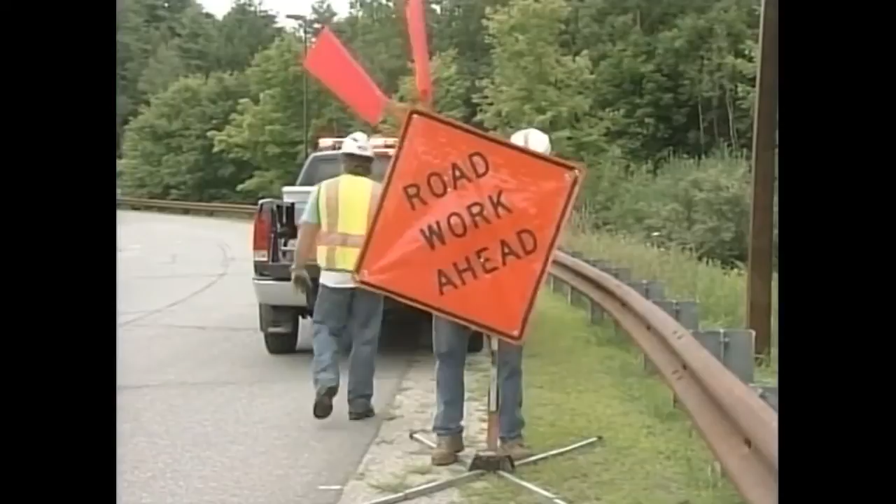Your safety, the safety of your fellow workers, and the safety of the driving public will depend on you performing your flagging operations properly. The minimum qualifications of a flagger are a sense of responsibility, a neat appearance, a courteous but firm manner, mental alertness, and the ability to react quickly. A good flagging operation is not something that just happens. It's the result of planning, good training, and following proper flagging procedures. This program was developed to help prepare you to be a flagger.

As a flagger, you're in contact with the public more than anyone else on your job. Your attitude and appearance directly affect the public's view of operations. A flagger's responsibilities are critical in keeping the work zone safe for workers, pedestrians, and the traveling public, and therefore their sole responsibility is to flag. Your first responsibility as a flagger is to have the proper clothing and equipment in good condition. Improper equipment reduces the driver's ability to understand your instructions. Neat dress and appearance also help you gain the driver's respect, making your job that much easier.

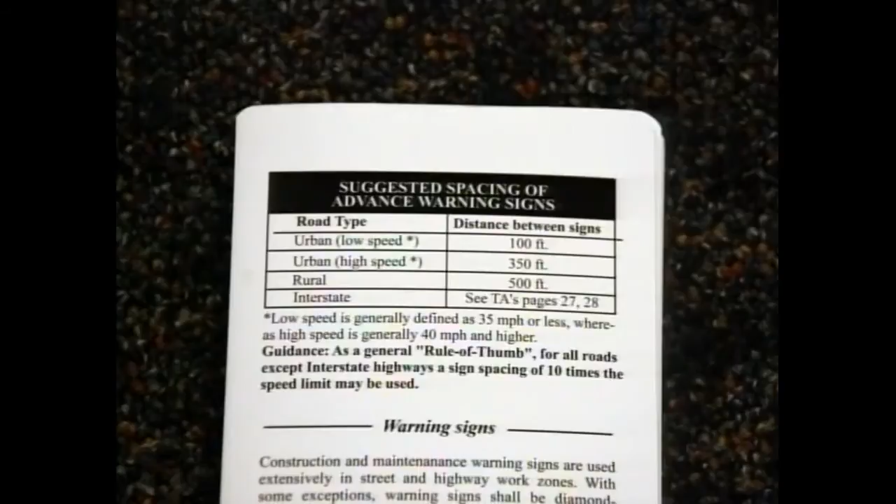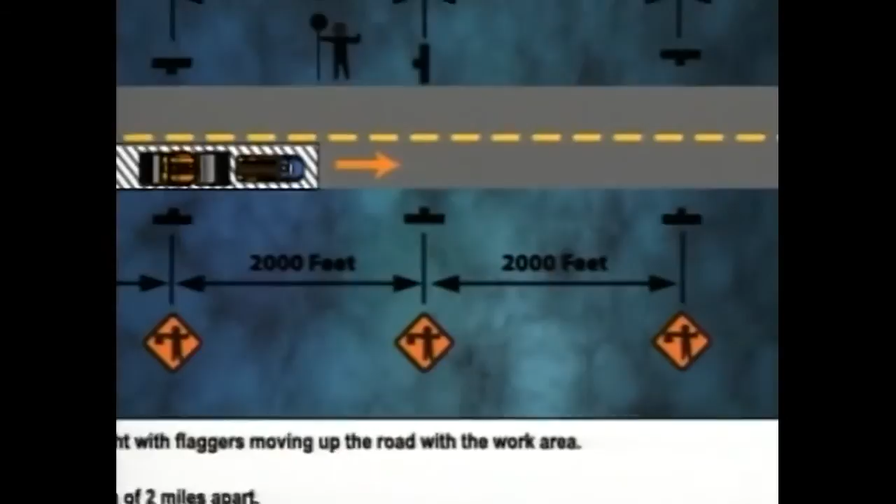Sign spacing shall comply with the current pocket field guide. The flagger symbol sign must be in place and facing traffic when a flagger is present. The distance between the flagger and the sign shall also comply with the pocket field guide. In a mobile operation, such as paving, sign placement shall comply with the Maine DOT approved traffic control plan for a mobile operation. The transition area is generally made up of a taper 50 to 100 feet long. This allows traffic to move out of its normal driving path using traffic control devices to delineate the flow of traffic. The flagger will stand on the shoulder of the road at the first cone in the taper.

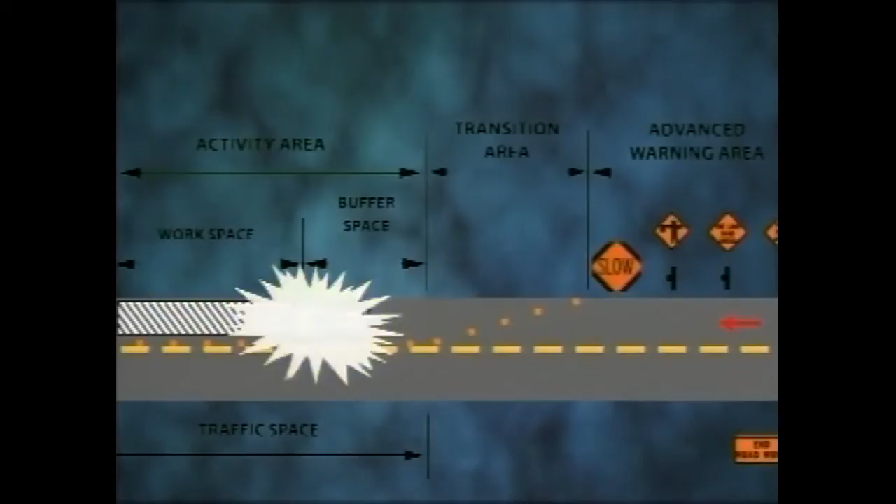The activity area consists of 3 areas: the buffer space, the workspace, and the traffic space. The buffer space creates a safety cushion for those vehicles that fail to yield to the flagger. At no time should personnel, vehicles, or material be located in the buffer space.

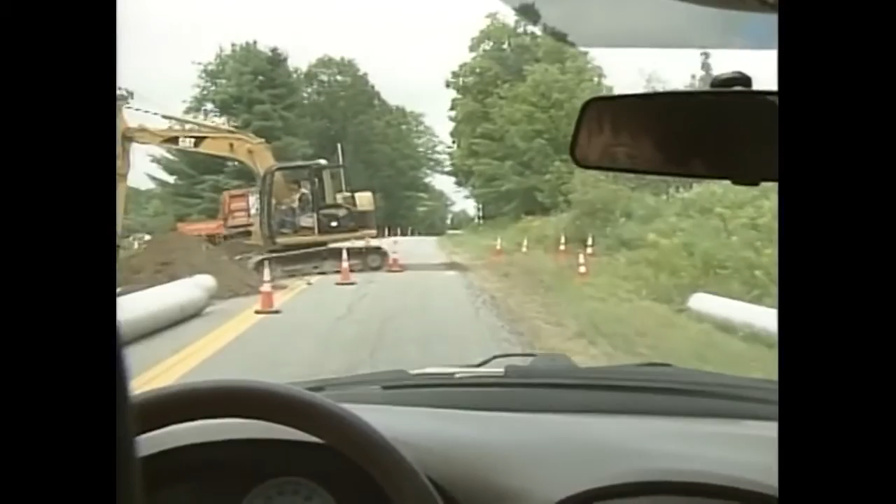The workspace is where the work is actually being done. It is set aside for workers, equipment, and material storage. This space is generally occupied by construction vehicles and workers. The traffic space is that part of the roadway that is open for public travel throughout the activity area.

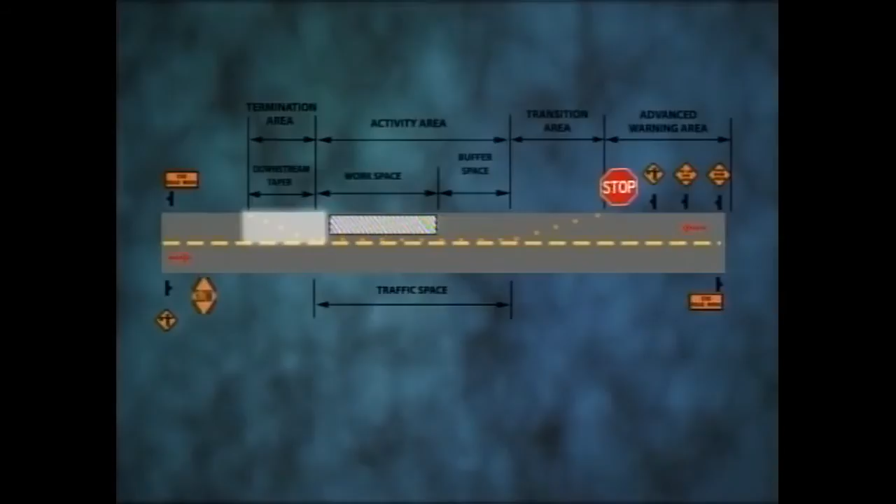At the end of the work zone is the termination area, which moves the traveling public back into its normal flow of traffic. The termination area consists of a downstream taper and should have 5 cones totaling 100 foot maximum in length. In those situations where 5 cones are not feasible, then a minimum of 3 cones may be used, but always allow for the flagger to be positioned 100 feet from the end of the workspace. This allows large vehicles room enough to safely move back into their normal driving lane.

Before beginning any flagging operation, advanced warning signs must be in place. For most flagging operations, this will include a road work ahead sign, a 1-lane road ahead sign, and a flagger symbol sign. In some cases, other advanced warning signs may be used, but in all cases the flagger sign must be in place before flagging begins.

Once the signs are in place, continue setting up the work zone by starting with the taper. Set up the traffic control devices throughout the work zone, ending with the downstream taper. Have flaggers stop traffic in both directions while cones are put in place. With traffic control devices in place and with proper equipment, the flaggers may now begin controlling traffic.

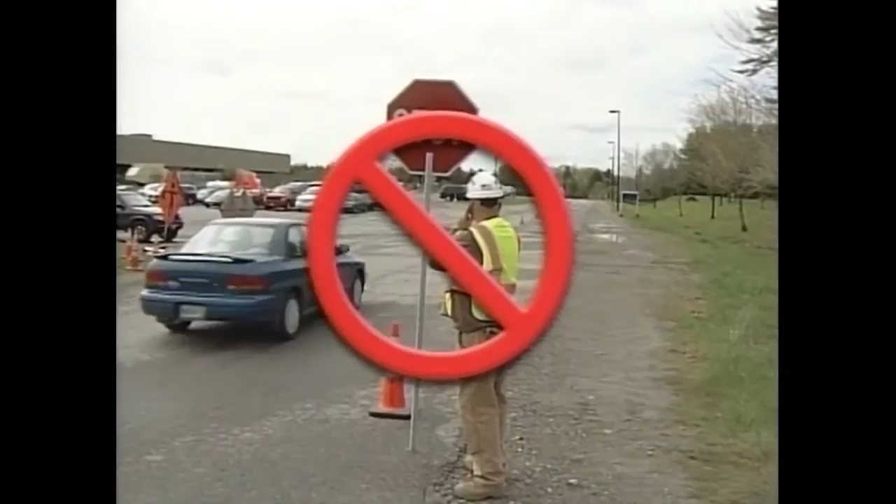Because drivers are sometimes tired, preoccupied, or impaired, you must remain alert at all times. Stay on your feet, facing oncoming traffic. Always stand alone, in a high visibility location, away from other workers and work vehicles. However, never stand directly in the path of an approaching vehicle. Avoid standing in a shadow or with anything inhibiting your escape area.

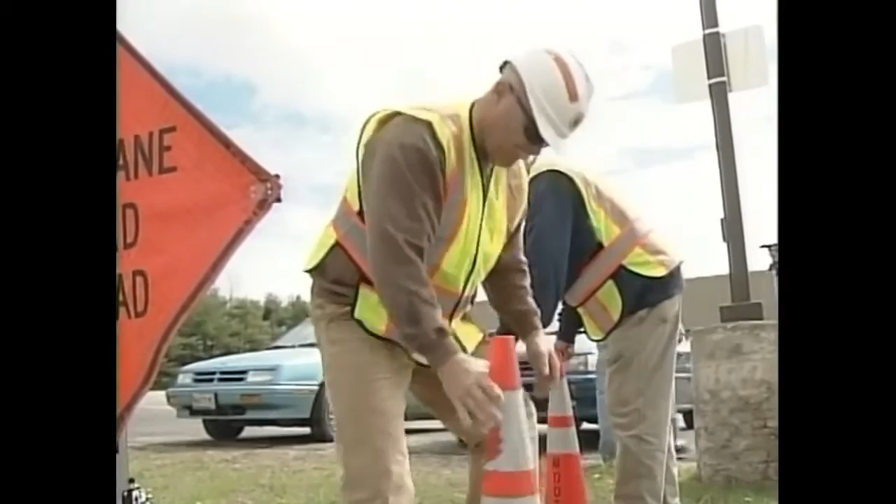When a flagger is required to direct traffic in an area where the escape route is partially blocked by a traversable object such as a guardrail, the flagger shall be physically capable of traversing that obstruction. Prior to commencing a project, the supervisor in charge should review the project, including guardrail area, for safe flagging stations. The flagger should clearly communicate with the supervisor, indicating any locations where they cannot safely perform their duties.

Generally, flagging operations require 3 basic skills: stopping, releasing, and slowing traffic. To stop traffic, stand on the shoulder of the roadway, with the stop paddle away from your body, on or near the edge of pavement. If possible, allow trucks and delivery vehicles to pass through and stop a passenger vehicle as your lead car for maximum visibility. Look directly at the approaching traffic and turn the paddle to stop. Raise your free hand with the palm exposed to the approaching driver. Make eye contact with the driver.

After you have stopped the first vehicle, then walk out to the center of the roadway so the additional approaching traffic can see the stop paddle. Do not cross the center line. Remember to watch out for traffic that may be coming from behind you. Never stand in the path of oncoming traffic. Before you release traffic, move back to the shoulder. Keep your paddle on stop until you are safely on the shoulder of the road. Only then may you release traffic.

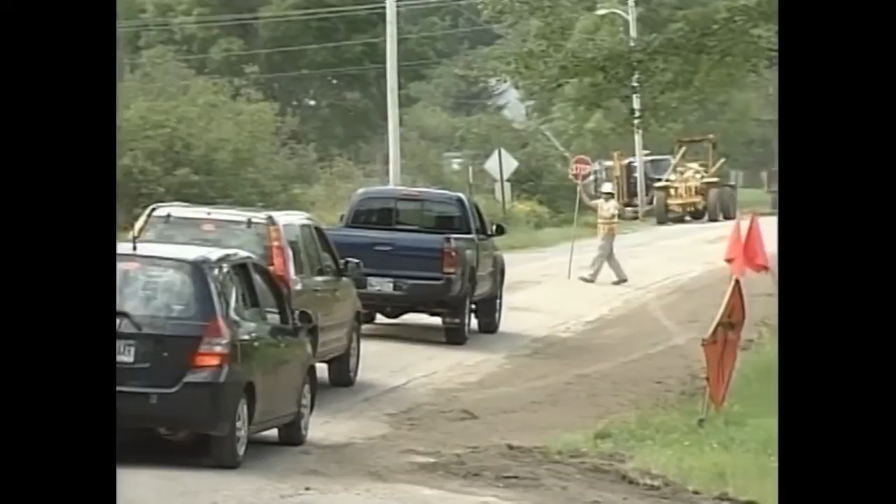The second way to release traffic is from the open lane. After the road is clear ahead, display the slow paddle to the drivers. With your free arm, motion the drivers to proceed. Again, be direct and deliberate in your motions.

In some cases, you may not need to stop traffic but only slow it down. In these cases, always stand on the shoulder of the road. Display the slow paddle to oncoming traffic. Use your free arm to motion traffic to slow down. Remember, never stand in the path of oncoming traffic.

If you learn these 3 basic skills, you'll be well prepared for any flagging operation. Situations will vary and how you apply these skills will differ from project to project. Remember, never start any flagging operation until advanced warning signs are in place. These signs tell the driver that you are controlling traffic ahead. Without these advanced warning signs, the driver does not expect you to be in the roadway.

Now let's look at some typical situations a flagger may face. The first situation is a single flagger operation. In rare situations, one flagger may be used to control traffic on a low-volume, 2-lane road. Where only one flagger is used, the work area must be short and on a straight section of roadway. The flagger must be visible to approaching traffic from both directions.

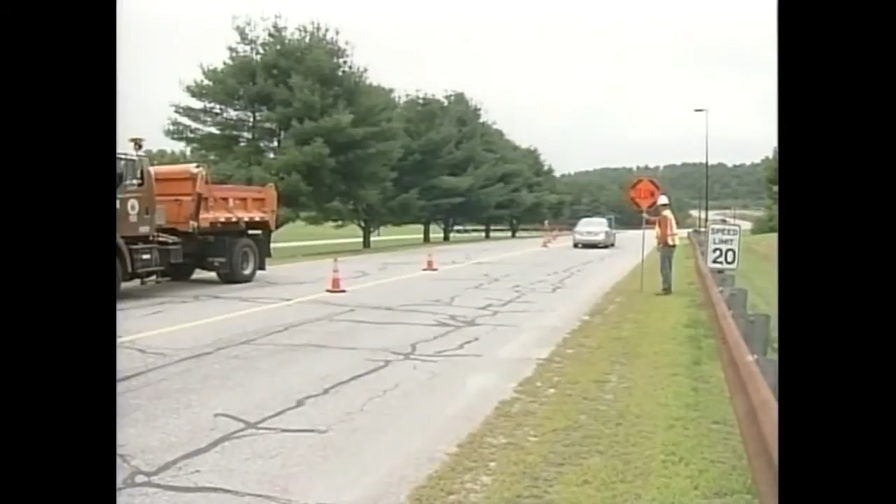In a single flagger operation, the flagger stands on the shoulder directly across from the work area, so that the flagger is visible to traffic approaching from either direction. Then the flagger can assign right-of-way with the paddle. Remember, a single flagger operation is only acceptable for low-volume conditions where there are good sight distances from both approaches and the work area is short.

The second situation, and probably the most common, is the two-flagger operation. When two flaggers are used, they must always be able to communicate with one another. This can be done by either visual contact or by using radios. Radio contact is the preferred method. Radio communication should be kept to necessary conversation. When radio communication is not being used, then flaggers must have visual contact with each other.

In this situation, the operation normally works like this. One flagger displays the stop side of the paddle and stops traffic, while the second flagger displays the slow paddle and releases traffic. The first flagger continues to display the stop paddle and stop all traffic until the second flagger turns their paddle to stop and gives an all-clear signal. This signal tells the first flagger to release his or her traffic by displaying the slow paddle.

The all-clear message may be given visually by using a hand signal such as lifting one's hand, or by use of the stop-slow paddle. Be careful, however, not to use hand signals that may confuse the motorist. When visual contact is not possible, such as over hills or around curves, or due to equipment in the work area, then radios are the best way to maintain communication between flaggers. Remember, communication between flaggers is vital, and radios are the best way to maintain that communication. It is never acceptable for the flagger to be stationed in the lane to see the other flagger better.

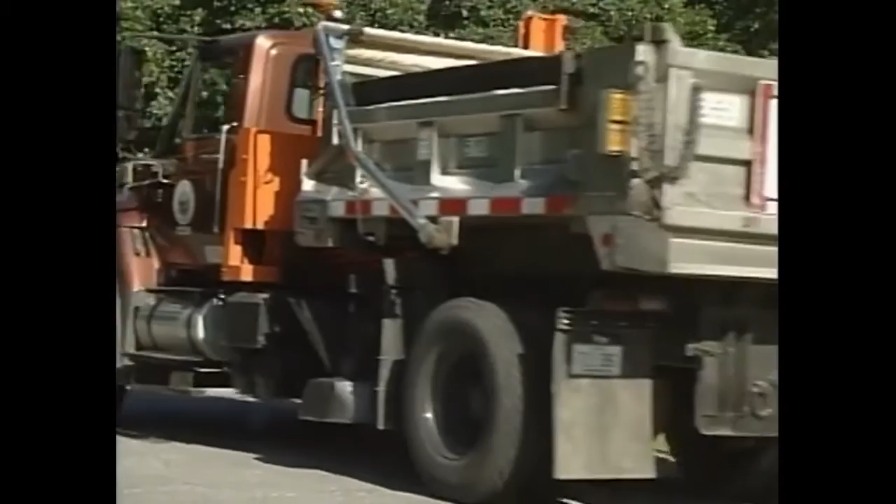The fourth situation involves only one flagger, restricting only one direction of traffic. An example of this is an area where trucks are loading or unloading and are blocking the lane. The flagger stops traffic in the usual manner. Once the work has been completed and the way is clear, the flagger releases traffic.

When releasing traffic on a two-lane highway where traffic is stopped temporarily in only one lane, turn the paddle a quarter turn, so that the word stop faces you. In this position, the sign is parallel to the shoulder of the road so that neither the stop nor slow can be read by the motorist approaching from either direction. The stop message then will not confuse the traffic.

If during normal flagging operations an emergency vehicle approaches your work zone, both directions of traffic should be stopped immediately. Traffic should be allowed to clear the travel space if there is traffic in the lane. Once the travel space is clear, the flagger shall direct the emergency vehicles through the work zone.

In some situations, the workspace moves and the flagger station needs to be relocated. Flagger stations shall be located such that approaching road users will have adequate warning and sufficient distance to stop at an intended stopping point. The flagger advance warning signs shall be moved when the flagger station is moved.

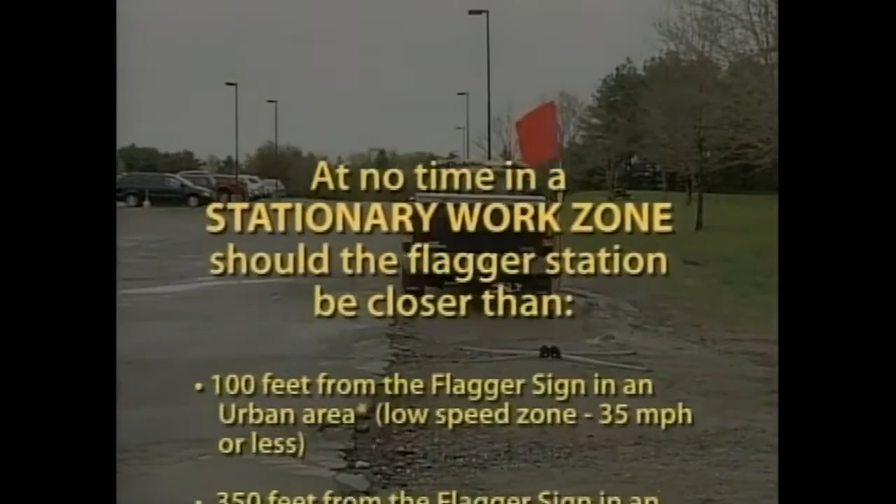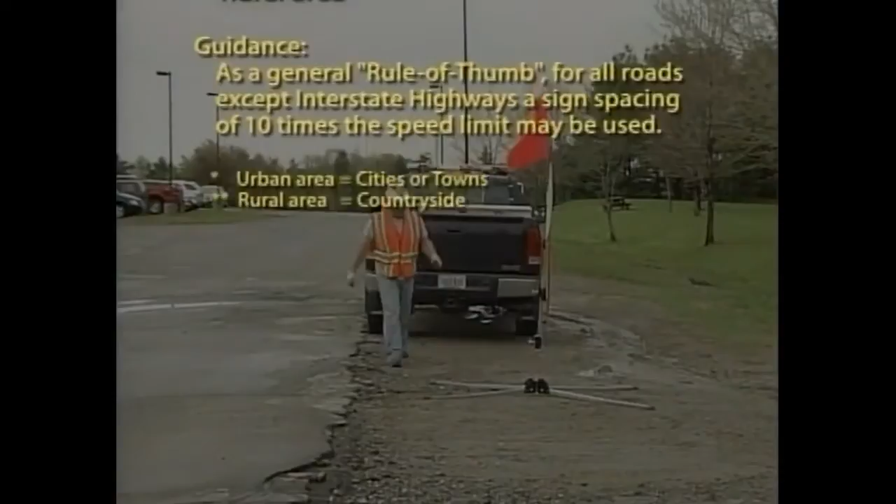When flagging operations are not active, the flagging signs should be covered or removed. As soon as the work is completed and the activity area has been cleared of all equipment and workers, stop traffic in both directions and remove the traffic control devices such as cones or barrels or barricades. Start by removing the cones in the reverse order of installation, beginning at the termination area and working back to the first device installed. At this point, traffic may be released. Then begin to remove the signs closest to your work area and continue to remove them against the flow of traffic.

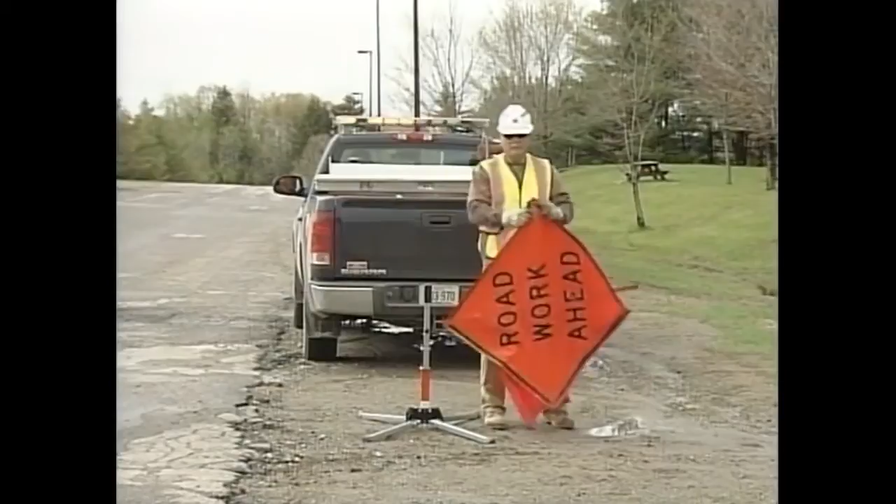Now let's summarize the 5 flagging situations we've just discussed. Single flagger operation. This operation is acceptable for low volume conditions where there is good sight distance and the work area is short. 2 flagger operation. This is the most common flagging procedure. A flagger works on each end of the work zone to control the movement of traffic through the work area. Good communication between flaggers is critical during this operation.

Nighttime flagging operation. This can be a dangerous operation because of poor visibility at night. All traffic control devices, including cones, signs, barrels, and paddles, shall be retroreflective, and the flagging station shall be illuminated. 1 flagger restricting one direction of traffic. This operation is normally used where one lane of traffic is periodically blocked.

Emergency flagging. If during normal flagging operations an emergency vehicle approaches your work zone, both directions of traffic should be stopped immediately. Traffic should be allowed to clear the space. Once the travel space is cleared, the flagger shall direct the emergency vehicles through the work zone.

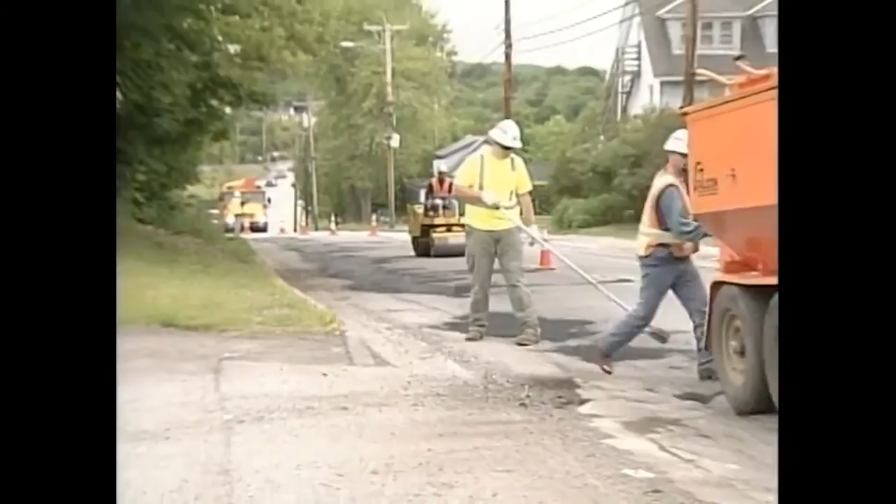Remember, no matter what flagging procedure is used, always stay alert, face oncoming traffic, stand alone in a good visible location away from other workers and work vehicles, and never stand in the path of approaching vehicles. Everyone, including the motorists, fellow workers, and you, will depend on your ability to properly follow these flagging procedures. If you have any questions about flagging or concerns about your safety as a flagger, contact the on-site supervisor.

The supervisor is an important part of a good flagging operation. As a supervisor, be sure that your flaggers understand their duties. Decide which situations require flagging and if flaggers are needed. Don't allow work to begin until the flagger or flaggers are in place. Select flaggers carefully. Alertness, good vision and hearing, courtesy, neat appearance, common sense, and a sense of responsibility are required. Flaggers must be trained by a certified trainer.

Be sure your flaggers have the proper equipment and that flagger signs are in place before flagging begins. Schedule routine breaks for your flaggers. Drive through the work zone and observe the flagging operation. Close calls or skidding means the flagger stations need to be moved or that other problems exist. Flaggers' sole responsibility is to flag traffic. Don't assign other duties, such as placing cones or turning signs.

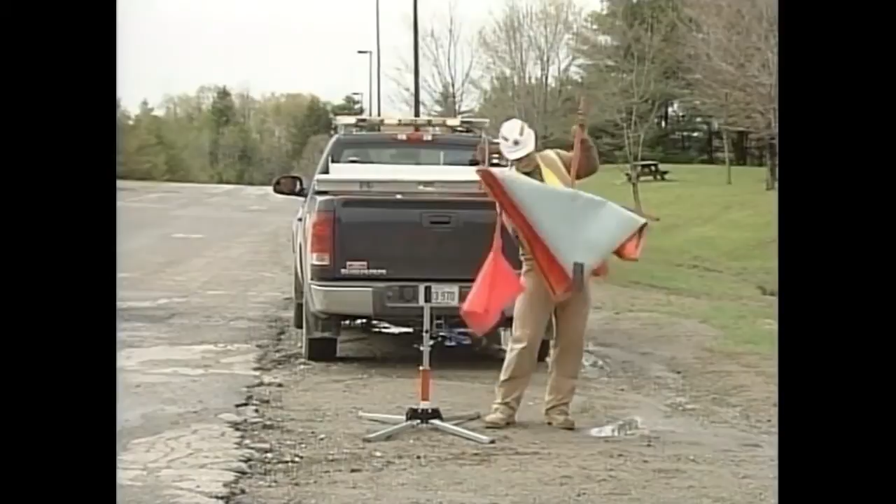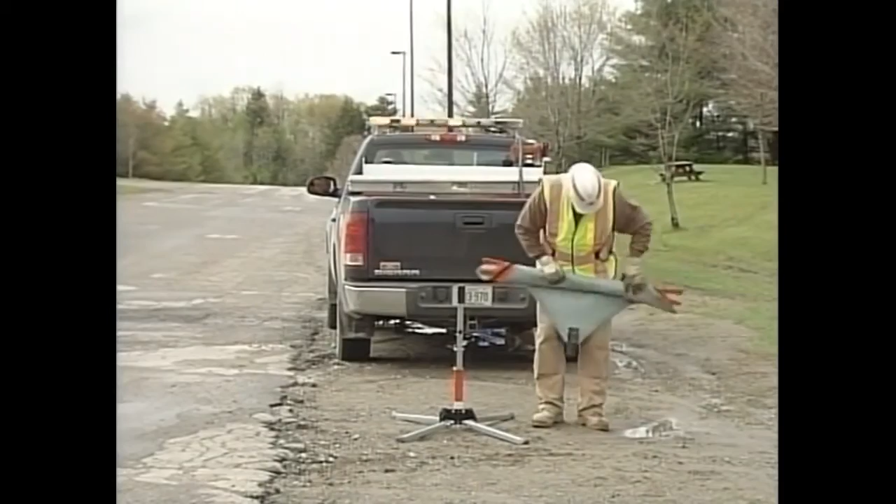Signs should not be left up after flagging is completed. Remove, fold over, or turn away the flagger ahead sign and other unnecessary signs when flagging is no longer being performed. Do not mislead the public. Remember, mobile operations, when the workspace moves, warning signs must also be moved. If there is an intersection within the workspace, additional flaggers may be needed to control traffic in the temporary traffic control zone.

Unless a flagger is a uniformed traffic officer, the flaggers may not override a regulatory traffic control device. Flaggers are only able to stop and release traffic. A uniformed traffic officer is needed to direct traffic.

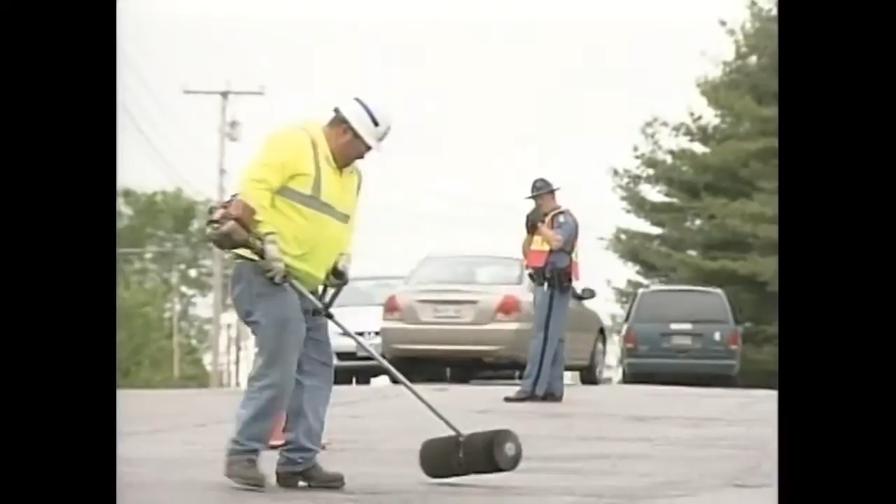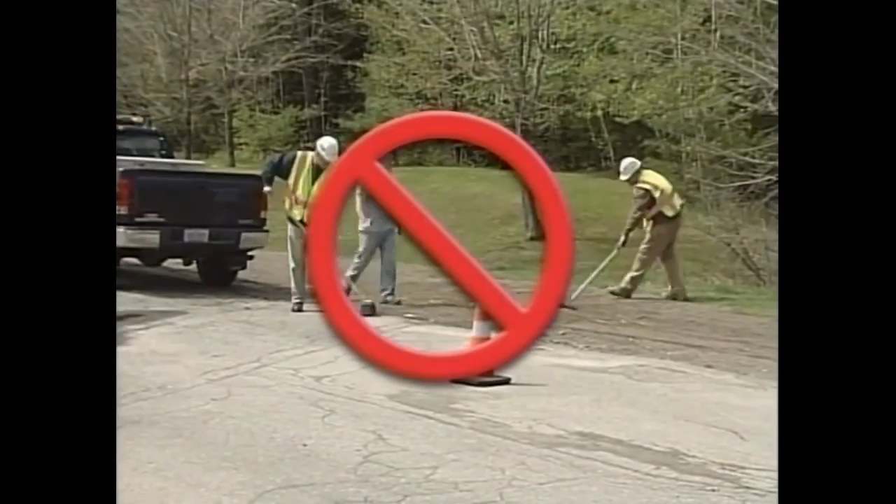There are 3 items that a supervisor should consider in planning for pedestrian and bicycle safety. Pedestrians and bicyclists should not be led into direct conflicts with worksite vehicles, equipment, or operations. Pedestrians and bicyclists should not be led into direct conflicts with traffic moving through or around the worksite. Pedestrians and bicyclists should be provided with a safe, convenient travel path that replicates as nearly as possible the most desirable characteristics of sidewalks or footpaths.

Most flagging operations require at least the following traffic control devices: 2 road work ahead signs, 2 one-lane road ahead signs, 2 flagger ahead signs, 6 stands, 2 stop slow paddles, and at least 15 cones. Flagging is one of the most important jobs in any construction, maintenance, and utility operation. It is also one of the most dangerous. Motorists, bicycles, and pedestrians should be guided in a clear and positive manner while approaching and traveling through a work area. However, with proper training, equipment, and procedures, flagging can be safe and effective.